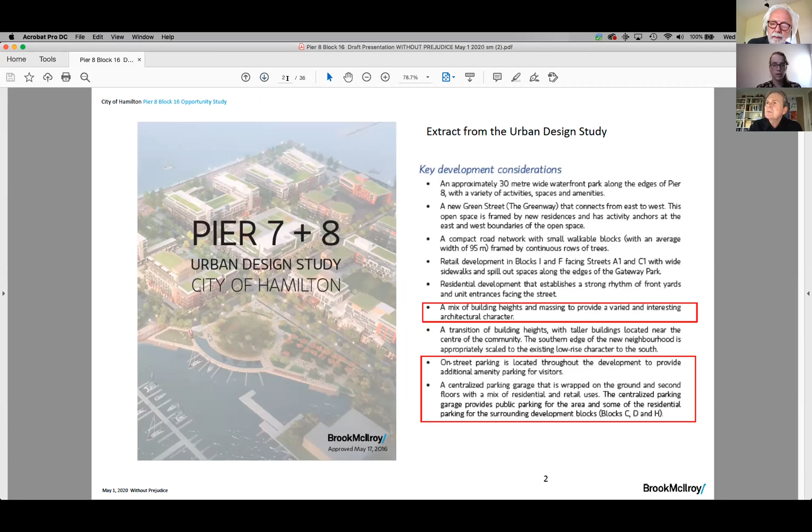Another interesting aspect from the original study that is relevant to this site is that on the east side of Block 16, which was zoned institutional, there is this idea about a mid-block connection linking the greenway, which you can see is labeled as number 4, that east-west pedestrian greenway, linking north to the waterfront promenade. So that's a kind of idea that we've resurrected as a way to help with thinking about the transition from the other blocks on Pier 8 and Block 16.

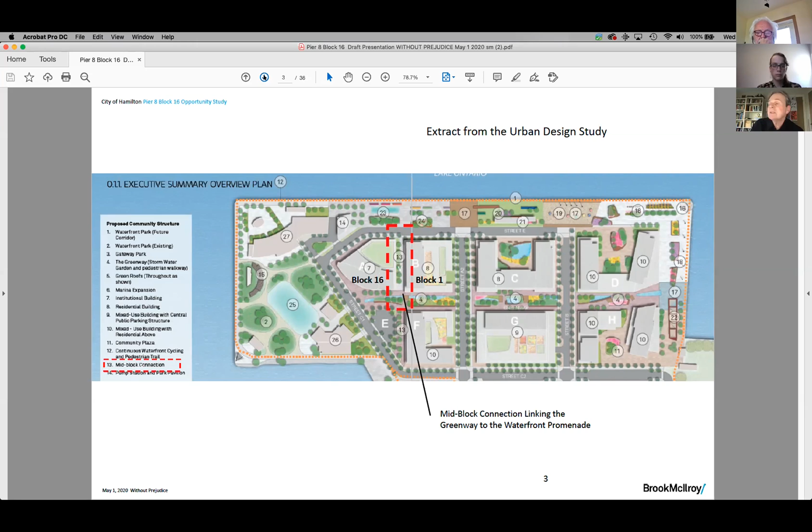Block 16 is a kind of exceptional site, both in the sense that it kind of terminates this west end of the site, but it is also directly aligned with James Street. So anything we put there has the potential to have presence well beyond this site, deep within the city. So we've taken a look at 3 scenarios. The first one is a mid-rise scenario.

And so that concept that I talked about in terms of this connection, we've started to think about the opportunity to create a kind of pedestrian mews that links the greenway to the waterfront. And in this case, having both Block 1 on the east and Block 16 on the west having a low-rise component lined with at-grade units. So this could be townhomes, it could be live-work units, but they would have actual front doors lining this mews, which would probably have a beautiful tree-lined walkway connecting to the waterfront.

In order to achieve that mews, this does not have to be a public space. It can be what we call a POPS, or a privately owned public space. So there would be agreements which would permit the public to move through the space.

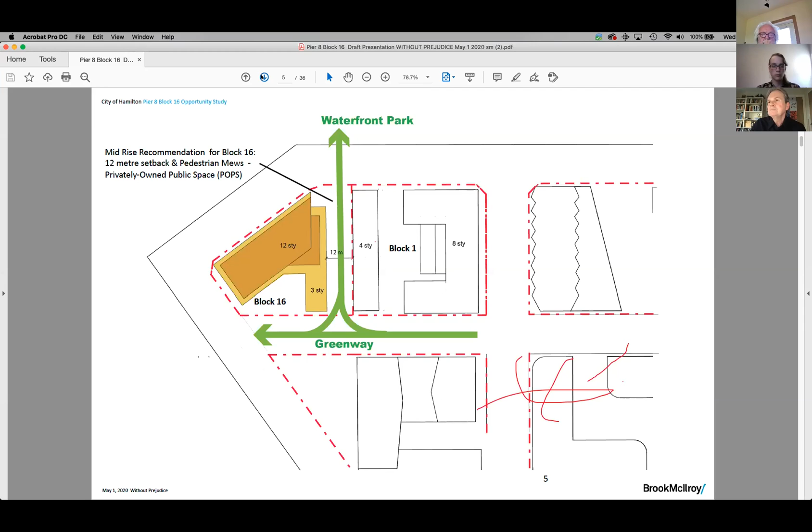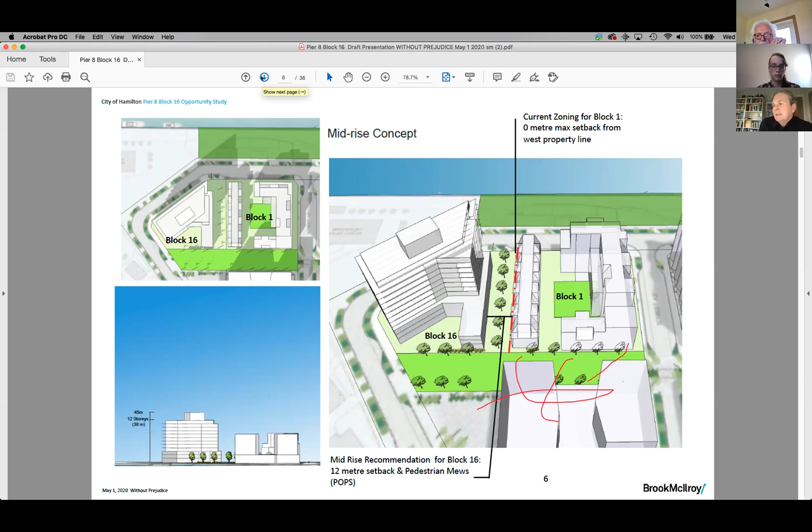So this is a three-dimensional view of the mid-rise concept, where what we've done is tested this idea of 3 stories on the mews, stepping up to a 12-story building. And you can see block 1 on the right-hand side has this 4-story building built right to the property line. So we're recommending in this scenario that there would be a 12-meter setback to permit the mews to be located in that space.

For each of these scenarios, we've been looking at shadow impacts, and with this 12-story version, we're seeing what looks like minimal shadow impact, similar to the impact of other buildings along the waterfront. So in our estimation, not really a negative impact in terms of the shadow impacts on the promenade.

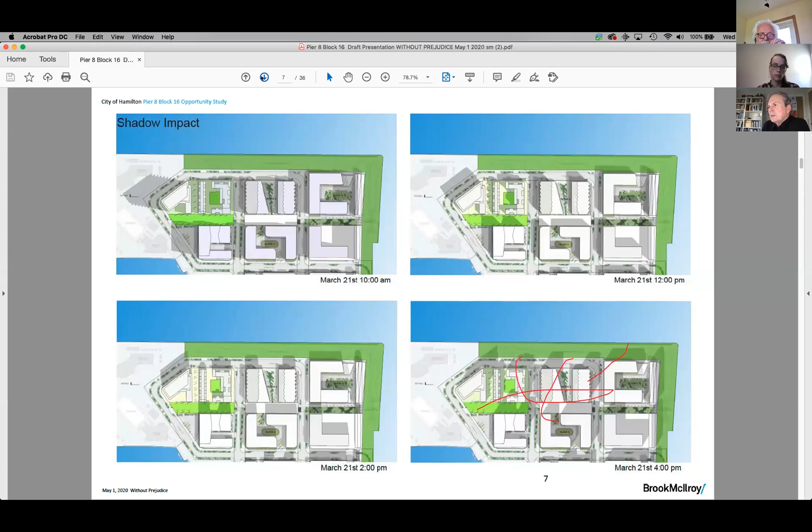Can you guys see that scribble on the lower right image? Or is that just on my screen? No, we can all see it there. I have no idea what that is. Sorry, it must be some glitch. So if you'll bear with me.

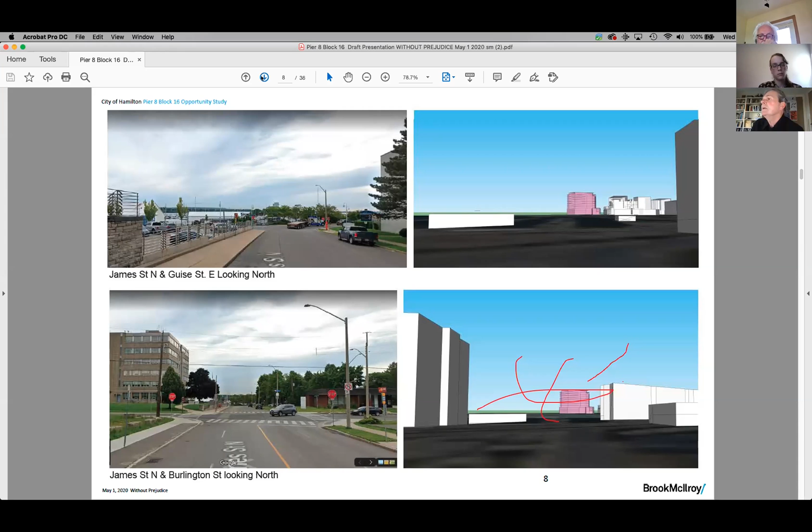Anyway, in all of these scenarios, we've tested what you would see from different vantage points within the city. So here we see images on the left, which is the existing condition, and then a model image on the right, which shows the massing and what you would see on block 16. So the mid-rise portion, very similar in scale to the existing context on Pier 8. And this is an overall view looking at the built form of Pier 8 with the block 16 mid-rise massing. And this results in a building close to about 150,000 square feet.

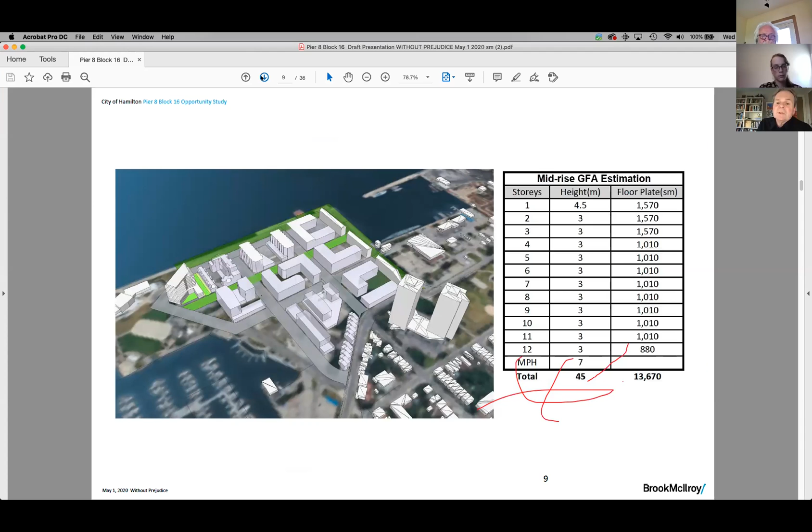The next scenario looks at a tall building. And in this case, we started this review looking at a 30-story building. I would say the choice of 30 stories was somewhat arbitrary, but was informed by what is recommended as a maximum height for tall buildings in the downtown. Mind you, we're not in the downtown, but we just took this as a kind of starting point.

So again, this idea of this connecting pedestrian mews, but in this case, because of the taller form of the tower, looking for a kind of wider width. So previously we had 12 meters, we're now recommending 15. And then anything above 3 stories would have a 25-meter separation distance. And in this case, it requires some modifications to the configuration of block 1 so that part of the mews is kind of on block 1 and the other half is on block 16.

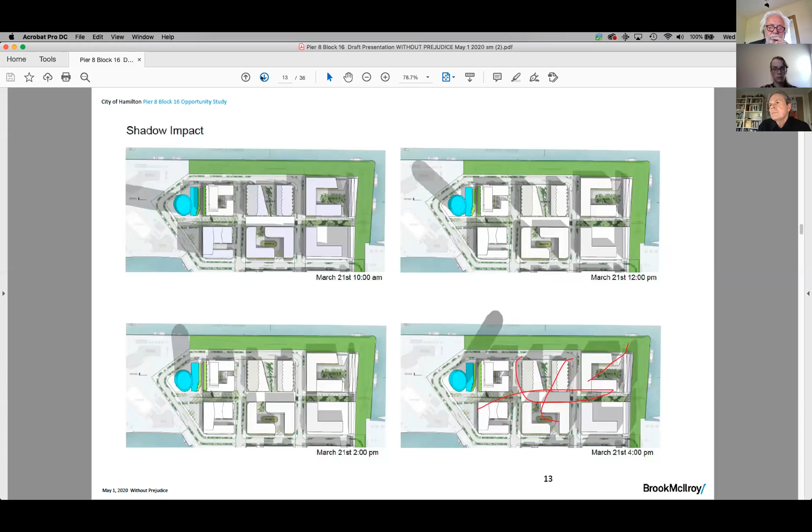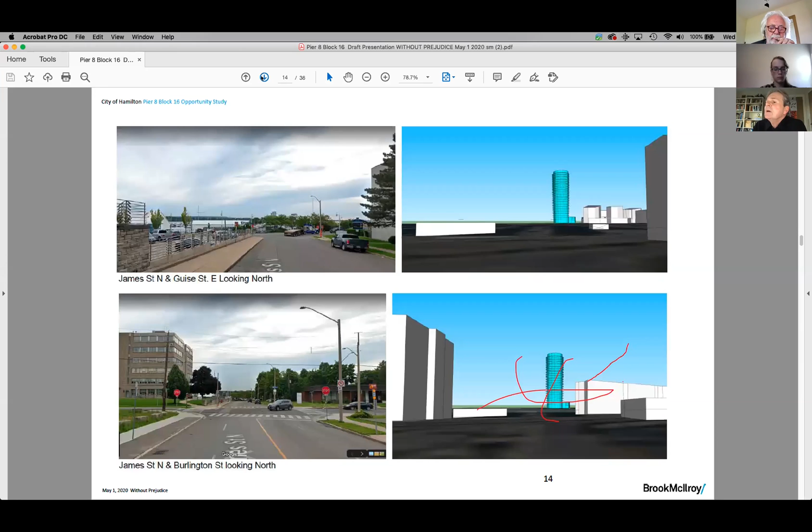And again, these are looking at different vantage perspectives of the 30-story version, looking down James Street. So the image on the top right and the bottom image on the right-hand side give you a sense of how this building has the capacity to act as a landmark, as a kind of beacon for the harbor, so that anybody within the downtown or coming into Hamilton begins to understand that there's something different and new happening. So the idea of associating this opportunity as a gesture marking the renewal of the harbor, I think is an exciting potential.

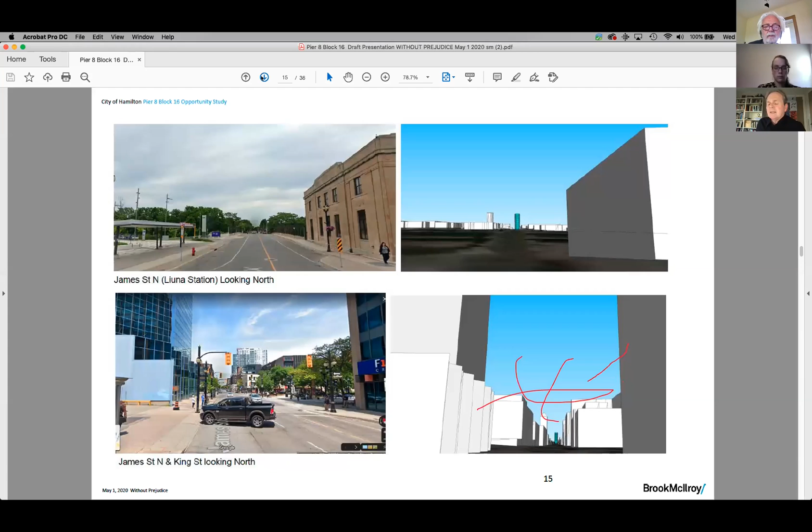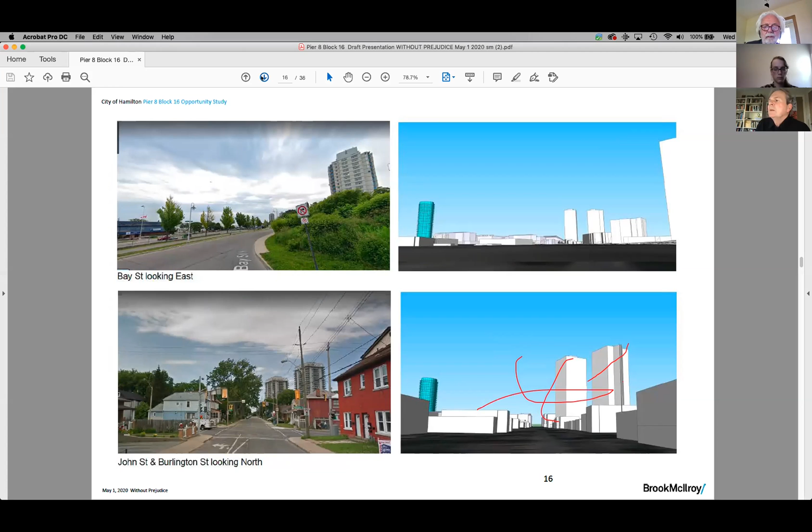When we looked at this 30-story version, however, from an iconic landmark perspective, our sense is, and this is purely an aesthetic urban design analysis, that at this height, the building is actually quite squat. It does not have the elegance of a spire or a beacon. And here you can just see different vantage points.

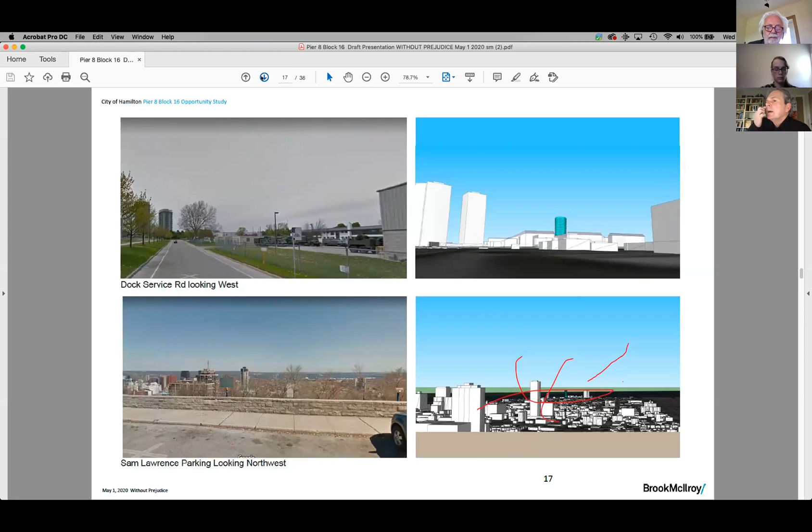So the third scenario, we took a look at a taller building at 45 stories. And you could ask, how did we come up with 45 stories? So this is the explanation. We took a look at the height of the tallest building in Hamilton, which is Landmark Place in the downtown, which has what we call a geodetic height. So its height sets a datum of 226 meters. And that's basically above sea level.

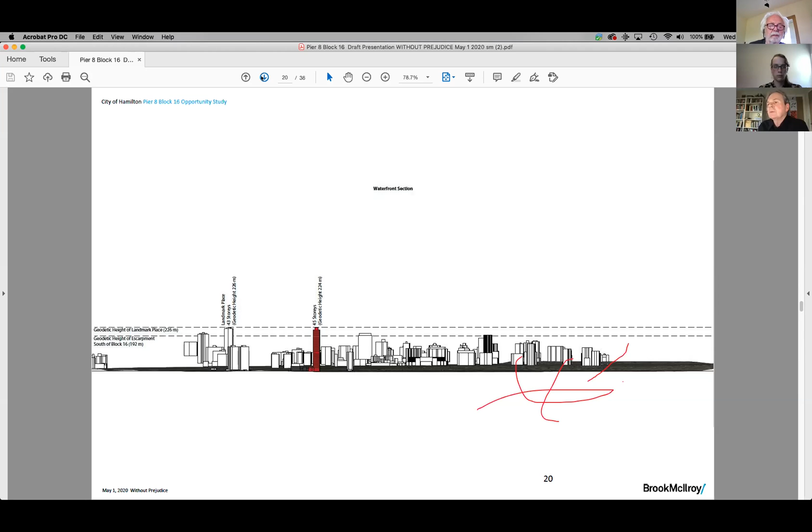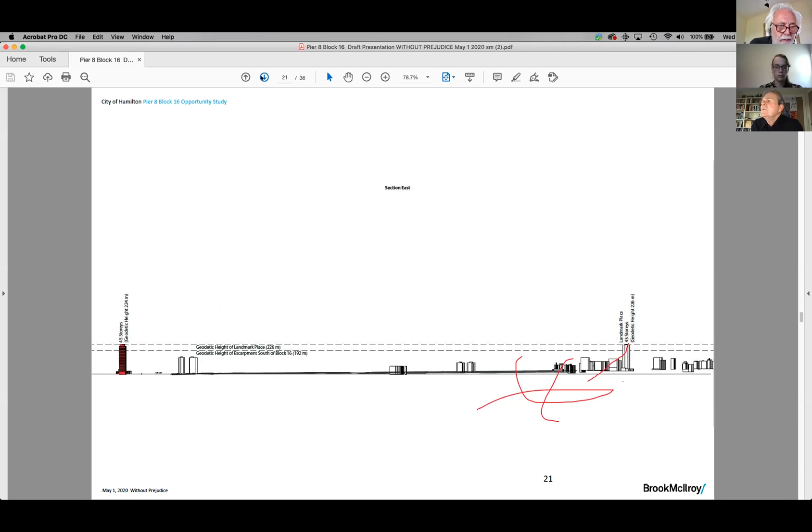So we extended that height across to the harbor. And because the harbor lands are lower, with a 45-story, we could actually be just under that geodetic height of the tallest building in Hamilton. One of the reasons we took this approach was trying not to set a precedent for buildings that would go beyond what is presently the tallest structure in Hamilton. So this is how we came up with the 45 stories. And here you can see the same datum extended from the downtown to the harbor.

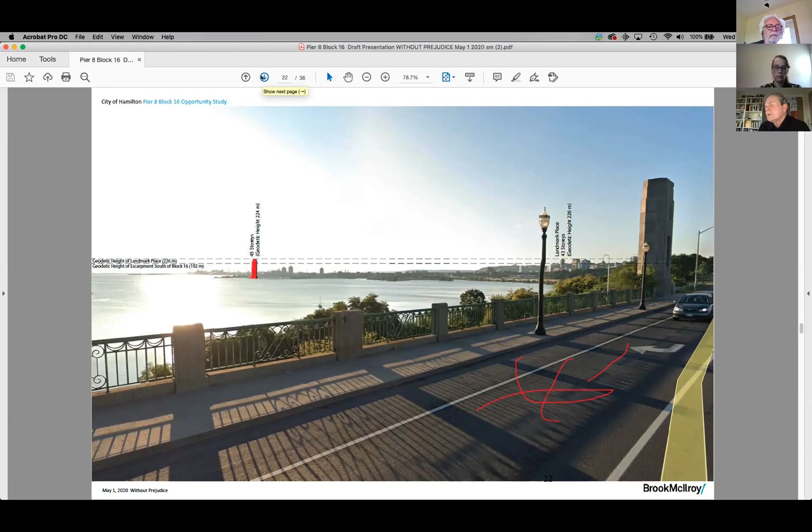And we also took a couple of views as you approach the city from the bridges. And you can see that very clearly this is beginning to act as this kind of harbor beacon, the signature associated with the renewal of the harbor. And also from the Skyway.

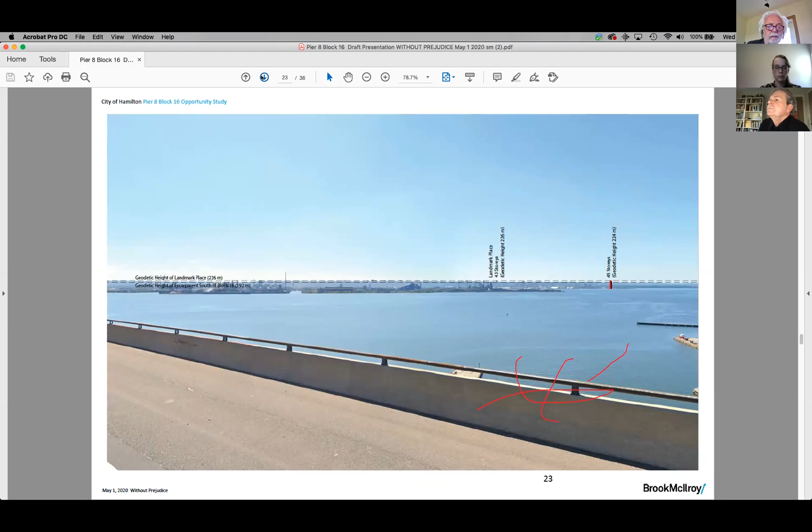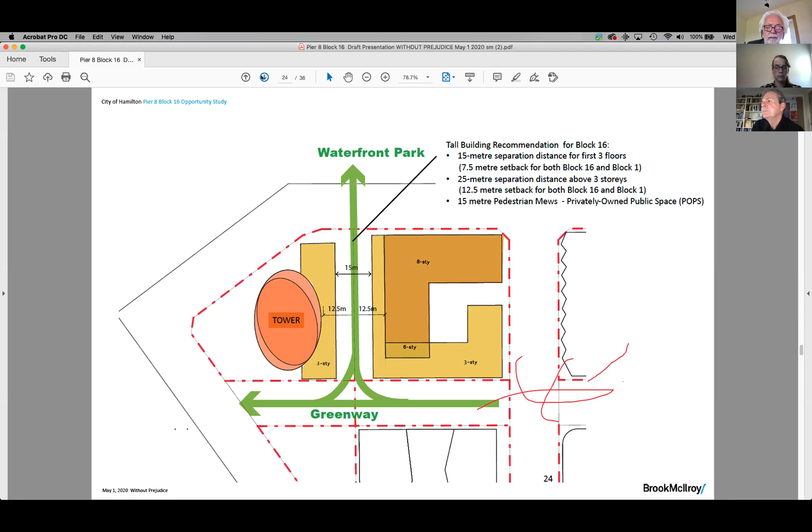So this is identical to the 30-story version, where we're recommending this mews with a separation of 15 meters for the lower portions, a 3-story base, and then a 25-meter separation distance between the taller elements of the site. And again, the same view of the mews.

So here we started to take a look at, if you just recall my analysis of the 30-story building being this kind of slightly awkward and squat building, scenarios of how this proportionally, I think, could be a much more elegant building, starting with a floor plate of about 850 square meters. But as we go up, it thins out to a 650 square meter floor plate. So it's tapering as it goes higher.

And as I said, this is not a design, it's just testing different configurations for how this tower could be deployed. In this case, a kind of rectangular form with its thin side facing James Street. A more kind of angular form, and a kind of circular or ovoid form, which has the advantage of helping with wind mitigation because of its form.

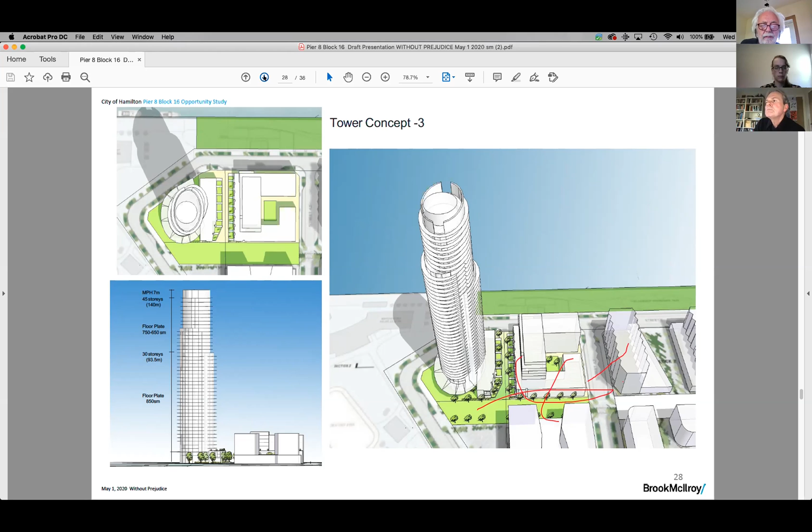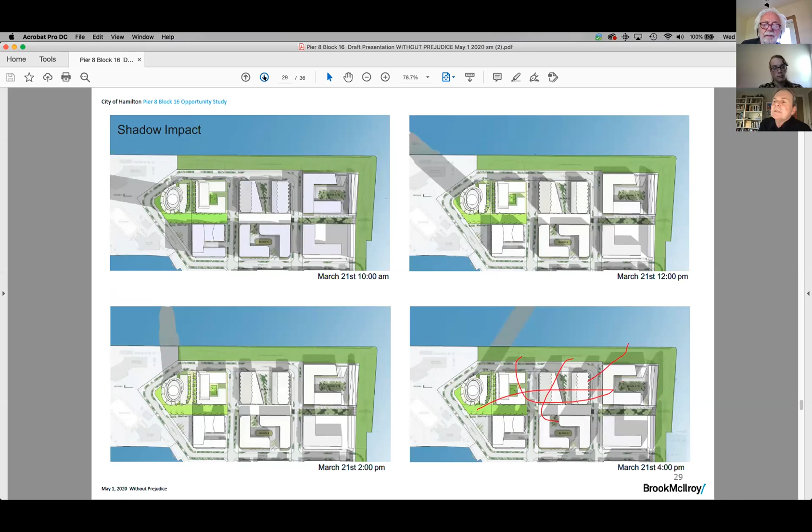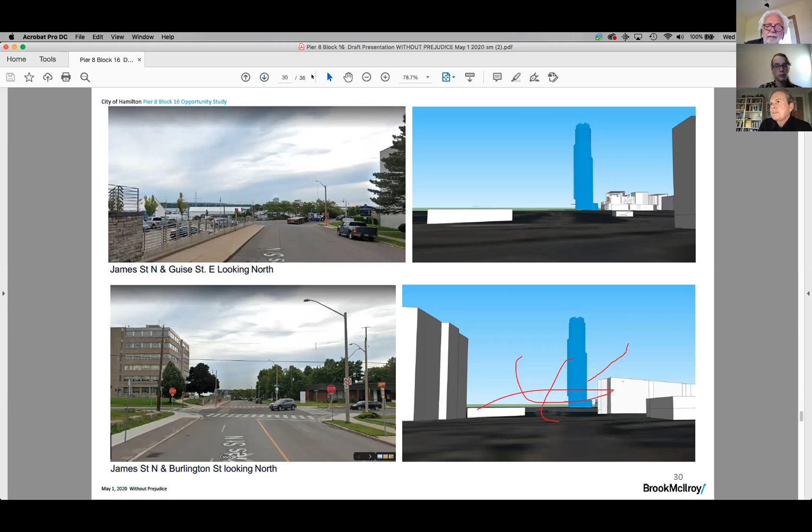So again, we tested this from a shadow impact perspective, and you can see the shadow impacts are pretty much identical to the 30-story version between these test times of 10 a.m. and 4 p.m. And here you begin to see what is clearly a very strong statement at Pier 8, very visible from all kinds of vantage points in the city, looking down James Street.

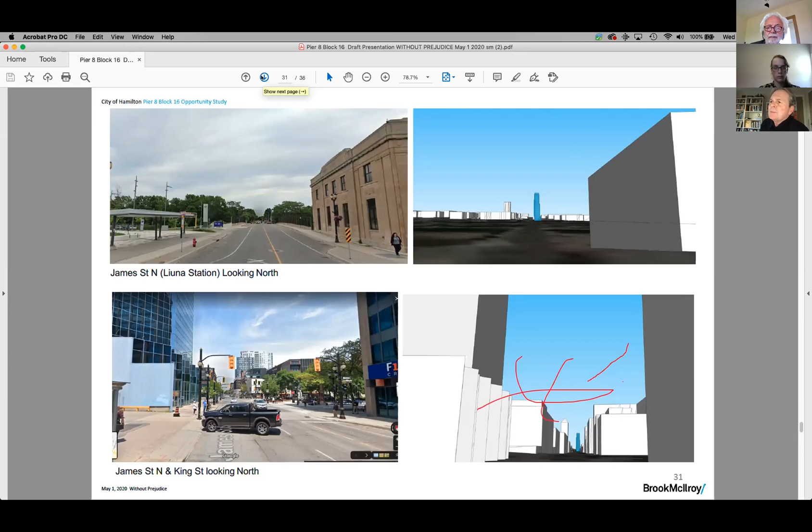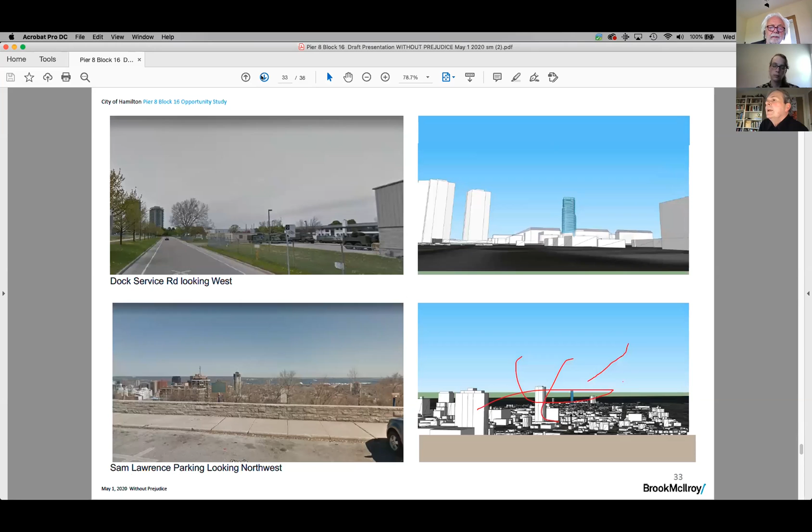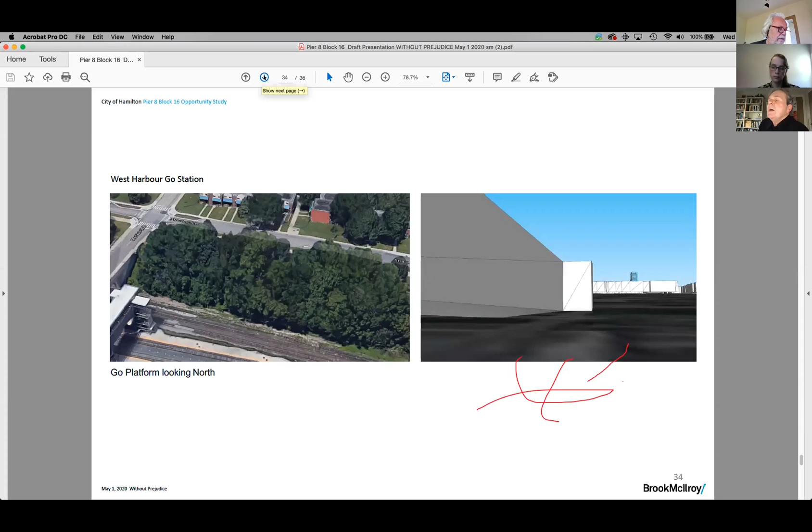So, as I said, our job is to translate these scenarios into guidelines. But I've said in the past and in our previous meeting with the planning committee that design guidelines do not create beautiful buildings. I think we take a lot of comfort knowing that Waterfront Shores and KPMB are likely to be the team to make this project a reality.

It has to be an exceptional building, I think, in order to create this kind of landmark that when people see it from anywhere in Hamilton, they feel good about it, they feel positive about it. And as I said to Herman, it's as simple as when people look at it, it should make them happy.

So you'll see that the scale of this results in a building that's getting close to 400,000 square feet. So a substantial number of units, could be up to 400 units within this building. The interesting thing about that is obviously it triggers the additional family units because we're above 31 stories. But it also means, because we're still at 1,645 units overall,